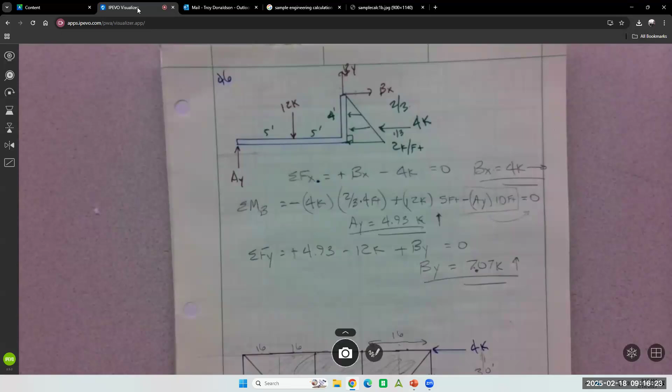All numbers should have units, right? So there is a basic format to calculations in academia, but there's also kind of a basic format outside. It can come to you a lot of different ways. So a lot of computer generated calculations are out there now.

This is a beam analysis. It's an LVL, so if you don't know what an LVL is, it's like a piece of plywood. It's laminated layers of wood, and we can take that grain of the wood and cross it. That's what plywood is, really thin pieces of wood, and then we can take the grain and cross it and build a beam that way.

Like a floor joist? And it's hell for strong. Like a floor joist? Well, floor joists can be regular timber, or the new ones they're making are like a truss joist. Yeah, that's correct.

So this one's rated at 1800, so that's an 1800 bending stress, 1800 PSI. Standard wood is about 800 PSI in bending stress. So if you just had a tree and you just cut a 2x12 and used that 2x12, bending stress would be about 800 or 900.

This is a pretty thin LVL, only 1.5 inches. So it's pretty thin, that's why its rating's down pretty low at 1800. You can get 3800 LVLs, 2800 LVLs, all different kinds. Still pretty strong, actually very strong.

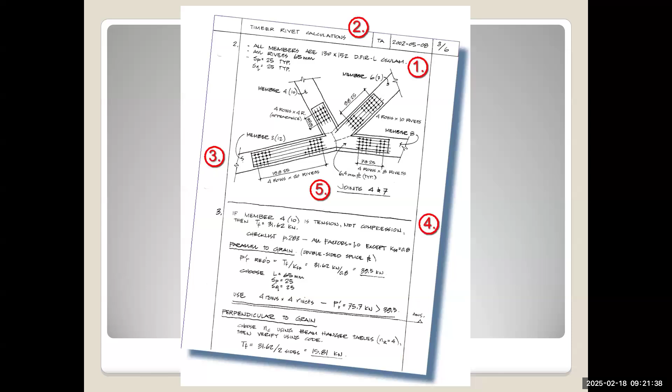So I'm not a big fan of these. I just am, I guess, old school a little bit.

All right, let's talk about a couple stresses that are pretty basic. Keep in mind, you'll take a whole term on this, so this is very fast, way too fast, but we can do it. You all are capable, you all have calculators, right?

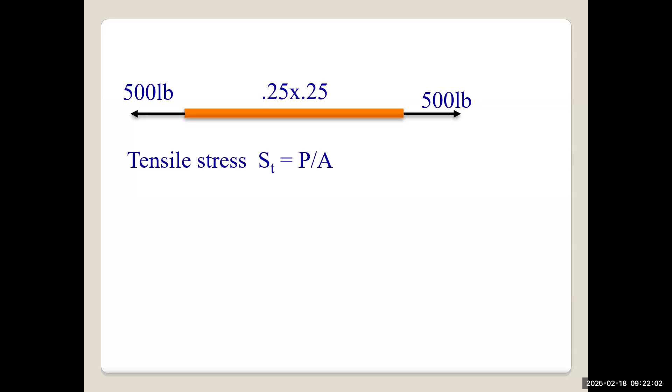Before we do the stresses, I want to give you the one that I think everyone's capable of, and that's the weight calc. So I want you to do a weight calc on your project. So the weight calc, come on. Y'all see that? Do I need to zoom in? I'll zoom in. How do we calculate weight?

If I want to calculate the weight of this yardstick, I don't want to just weigh it, but I want to calculate the weight of it.

That's my property. We need to know how much mass is here. What's another way of saying volume? We need to know the volume of this thing. Everyone understand what volume is? It's the amount of material that is in it three-dimensionally, a three-dimensional measurement of this thing.

So if I needed to know the volume of this, how would I get it? Length, width... all right, let's do it. It's multiplied by each. 36 inches long. It's supposed to be 1 inch, but it's not.

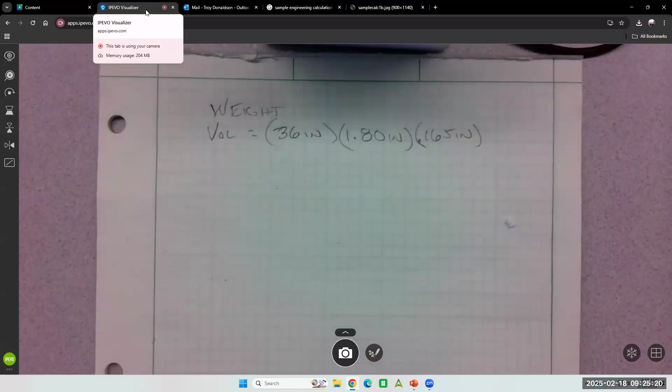So it looks something like that: 36 inches times 1.80 inches times 0.165 inches. What do we get? I got 10.69 inches to the third. So to calculate weight, we need the volume of the thing.

And then what do we need? Something that indicates how heavy the wood is per... what's that called? Density. We need the density of the material. No clue what the density is. Pretty light - how many cubic inches do we have?

Somebody Google balsa wood. I think it might be balsa. I have the density of mine right here. No, that's not so strong. Let's do balsa wood - somebody look up the density of balsa wood, and we need it in US units, not metric. Really soft, Google really likes to give you metric. Yeah, the density has got absolutely everything, especially wood, wood's good.

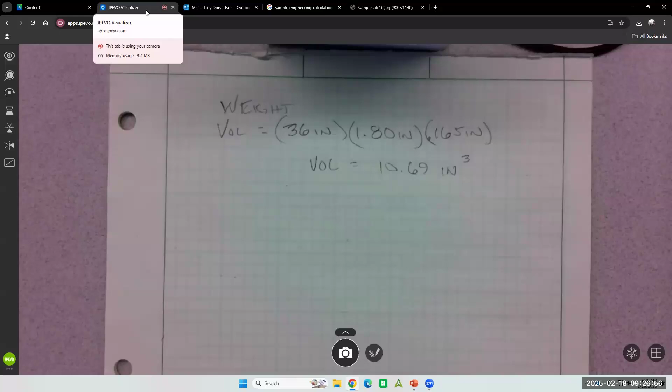Could be green, it could be wet wood, dry, it should be kiln dry. Anybody got a balsa density? We're gonna be looking for something like pounds per cubic inch or pounds per cubic foot. 8 to 16 pounds. All right, so we'll say the density is 8 pounds per foot cubed. That's what we'll say it is.

You'll get the same kind of information when you try to get the density of cardboard. I'm sorry about that, but good luck. How else could we get the density of this?

Is there any experimentation way we could get it? By smacking someone or something? No, not by smacking - that's a good idea though. Perch, I think it's perch. What about that idea? Yeah, we can get that. That'll give me the density of this, won't it? So I can get it by experimentation.

Is it actually reading anything? So isn't that too short for it? 0.04 - no, it's weighing the whole thing. Oh, okay, so that volume weighs 0.04 ounces. I think it's perch. Also it snaps really easy. It's on kilograms - let's get it off of there. Yeah, 0.10 pounds.

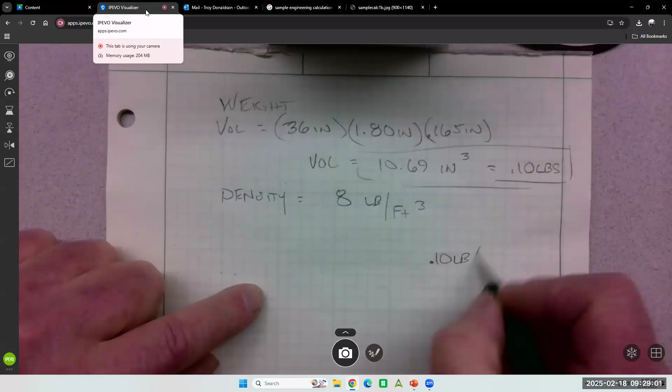So this volume weighs 0.10 pounds. So we can look up the density if we're pretty sure we can get it, or we can do it by experimentation if we know the volume of a sample. This says 0.10 pounds per 10.69 inches cubed, correct? That would give me pounds per inches cubed, and that is a density.

Gesundheit. Anybody got this number? You just - I'm assuming you multiply that. Don't multiply it, no, you divide it. It looks like a divide to me. Oh okay, yeah, because you're isolating - you're just figuring out what it is for the...

0.00935, yeah. Well, let's get it per foot cubed, that'd be better. How do we get it per foot cubed? You have to divide it by 12. Careful - where did you... the unit is cubed.

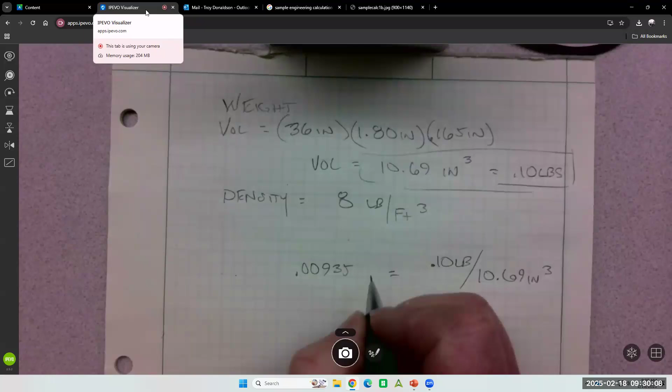So this is called unit analysis when you do a conversion. And I always write it out - I don't try to just think do I divide, do I multiply, what the heck do I do. I always write it out, always, even like 12 inches per foot, I write it out. If I'm gonna convert inches to feet, especially for somebody else that might be overlooking this.

So here's the density we came up with, and if I want it in pounds per feet cubed, then I need feet cubed on the bottom, and I need 12 inches cubed per feet cubed, because there's 12 inches, so that's the conversion. You cube the number, you cube the unit, both of them get cubed. Now these cross when I multiply them - that's called unit analysis. I want the inches to go away, inches cubed.

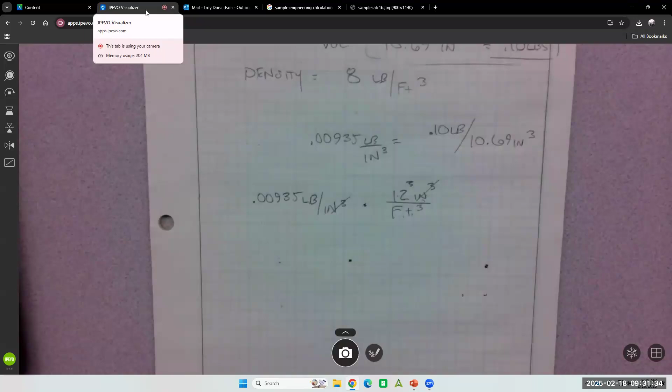Leaving me with pounds per foot cubed. So it's not a division, it looks like it's a multiplication by 12 to the third, right? Because the unit is to the third. So I can take my 0.00935 and multiply by 12 to the third.

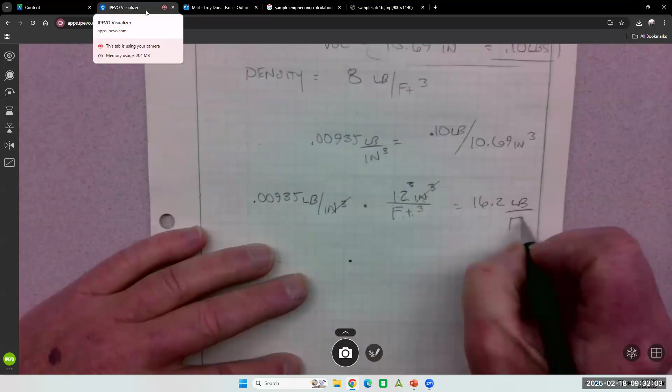Yeah, that's carrying everything out. You wouldn't want all that. I'd probably just call it 16.2 pounds per foot cubed. Right? What did you get? I got 16.2.

Makes sense? So you round according to how confident you are in the information you're getting. Like, I'm less confident, right? Because it's missing some parts. It's not actually the full 3 foot, and it's got another hole there, and a gouge there. And I actually don't even know if it's 36 inches. I think it's probably close, but there's some lack of confidence.

So then how would we get weight, now that we have this for my stick? Well, we got weight because we weighed it, but if we're calculating, we need the density and we need the volume. If I had more balsa pieces out of this material, then I just need the volume of those pieces multiplied by the density, and I get the weight. That's the weight calculation that I want.

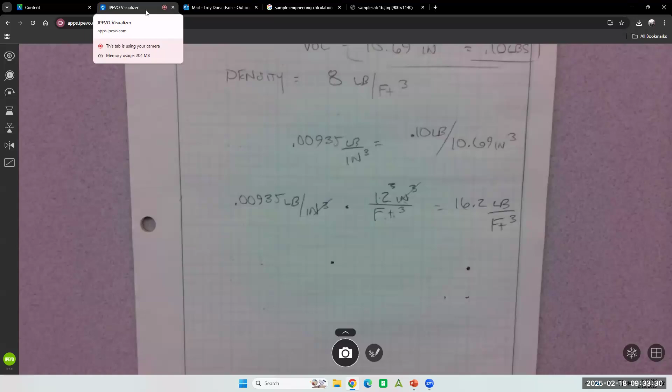I want you to come up with the density of the materials you're working with, and then calculate the weight of individual pieces. That's what we would do if we were doing a weight calc on a design. If you're in SolidWorks, you can set material to parts and get weight information per material. In the end, you can calculate the total weight of the system. So, individual parts, calculate the weight. That's a good calculation to have in your calculation package.

Make it presentable, beautiful, like engineers would. Good? So far that's a simple one. Pretty simple. You just need to measure your parts, know what they're made out of, and multiply by a density, right? You get a volume, multiply volume by density. Yep, that's right.

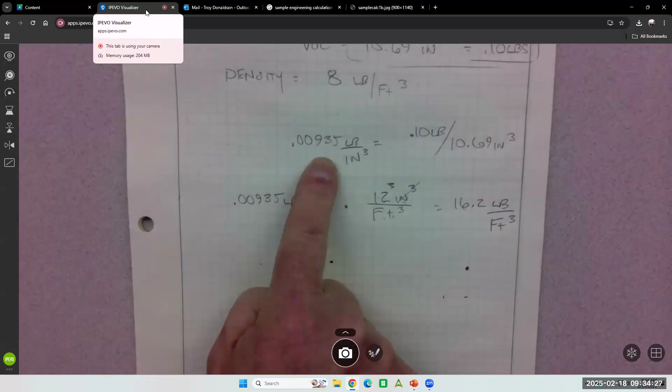If you're measuring in feet, then this is a good one to use. If you're measuring in inches, then this is a good one to use. So I wouldn't look up cardboard, I would take a piece of cardboard, calculate its volume, weigh it, and now you have the density of the cardboard you used. Because all cardboard's not created equal, there's a lot of different kinds out there.

Now, you can get as technically accurate as you want and as time allows. If you're gluing things together, you could estimate the volume of glue and come up with the density of the glue and add the glue weight in. It can go very technical if you want to really get tight with your weight. What I want to see is a calculated weight, and then in the end we're going to weigh our devices and see how that calculated weight compares to the device. It'll be close, should not be exact. So if you're fudging the numbers, don't make it exact. That's not gonna happen.

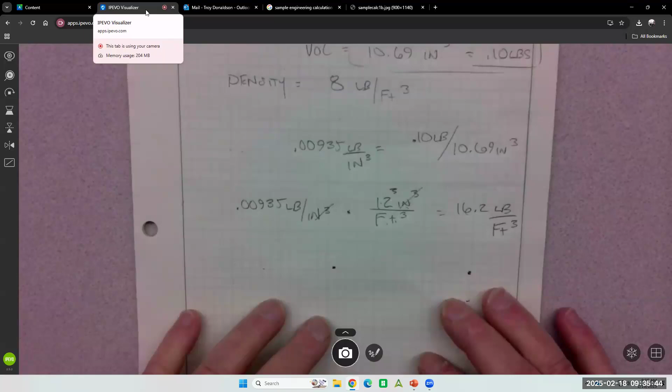Okay, questions on the weight calc? It's good. Okay, let's talk about some more that you could do. Unless there's a question, comment, anything so far.

We're gonna be weighing our builds in this factory. Right before you test on the final day, you weigh. And if it's so big that we can't get it on that scale, then you'll stand on a scale, and we can do the subtraction. I think most will fit on that.

We've only done two so far: bending stress and tensile stress. Tensile stress is going to be a hard one to come up with for this project, but it's an easy one for me to show you. Bending stress is more complicated. So bending stress, we should be able to come up with something we can do a bending stress on. I'm not asking you to do calcs on your entire system, I'm asking you to do a calc on one little piece of the system, a structural piece, a somewhat structural piece.

Okay? Like if you had wheels and an axle, an axle's an easy one to do a bending stress on, right?

If you have some kind of frame or mainframe, that would be an easy way to do a bending stress on. If you have a flat surface that has load on it, then we can simulate bending stress, and we're going to really simplify it. If you look at your device and have no idea what to do for bending stress, come to me and I'll show you something you can do.

Okay, so let's talk about bending stress. The simplest form of bending stress is like that beam that I showed you. So if you have a structural member, we're just going to simulate it as a beam. Even though it's not a beam, maybe it's a big flat surface that's carrying the load somehow, got the egg in the middle, who knows. We're going to turn it into a very simple bending stress calculation.

What is bending stress? The point that it can flex without breaking - it's not failure, that would be failure stress. As engineers, you're going to work in the safe region of material properties, so we don't want to get anywhere near failure. Most of the time, failure for us is too much deflection.

If you've ever walked in an older home, like from the 50s, as you go across the floor, you can actually feel the floor flexing, like it'll move. That would be failure today. In today's floors and homes, we absolutely don't let them deflect hardly at all, not even when you move the piano in. So for us, most of the time, failure is too much deformation.

So there's bending stress on it right now. I'm putting a very little bit of bending stress, and you can't see any deflection. That's the bending stress that we work with - that's safe. This, no. Nobody wants to drive across the bridge and watch it go like this as you go across it. Nobody wants that, right?

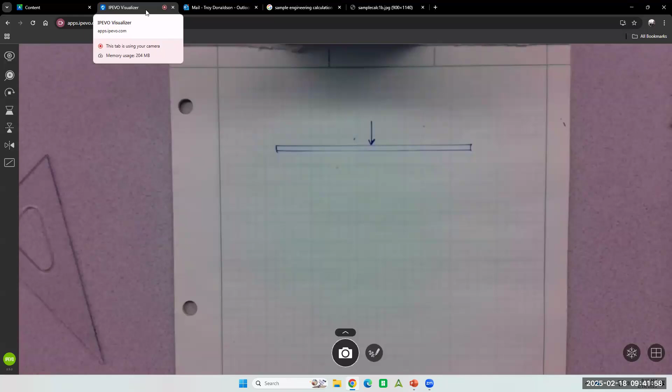So a car driving down the road at 60 miles an hour, cruise control, we can do a static analysis of that, even though it's moving - it's just not accelerating or decelerating. Okay, so if it's supported here and here, then we do need to have equilibrium in the system. So all the forces going down need to add up to all the forces going up. Anyone know that? Who's responsible for that law?

Newton, yeah. So Newton was sitting there under the tree, and that apple fell - well, that's the story at least. And then it stopped on the ground, and he's like, wow, what stopped the apple? The ground stopped the apple. How much force? Well, how much force was the apple pushing down? The ground was pushing up, equilibrium. So he got three laws out of just basically one concept. Pretty cool, because he said, oh, if it's not in equilibrium, then it's not in equilibrium. Like, no kidding. Anyway, all the forces down have to equal all the forces up.

So if this is 5 pounds, and it's in the center, symmetry - so be kind to yourself and set up the problem pretty simple. How much would have to be here and here? 2.5 on each side.

Right? And I didn't even know the distance. Like, is this thing a mile long or a foot long? I don't need to know that, right?

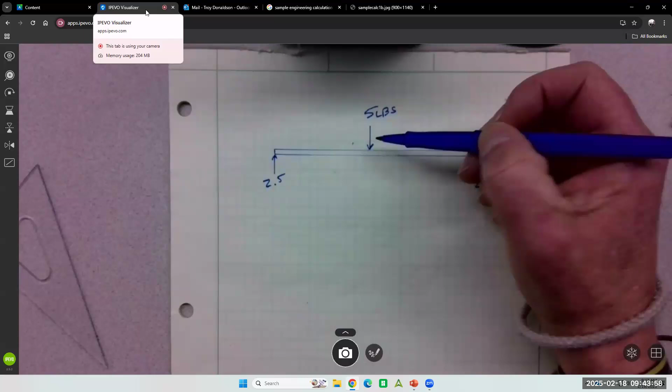Now, it's got 2.5 here, 2.5 here, and 5 here. And we'll say it's 6 inches and 6 inches. It's in the center. If it was different, that changes our loads on these, called reactions. But it changes the load on the supports if this is not in the center, right? As this moves closer to this side, this gets bigger, this gets smaller. There's ways to calculate that, but I'm not going to make you do that.

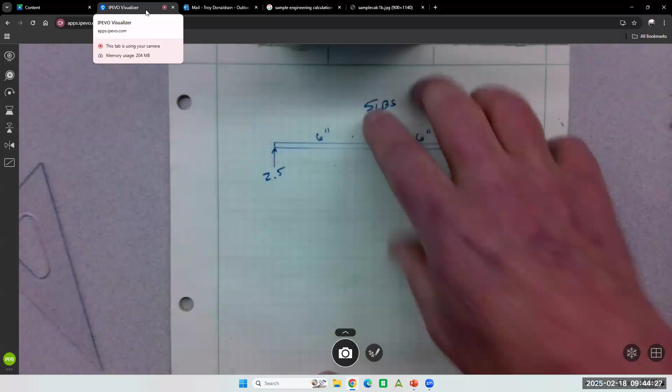So this is called the translational effect, the up and down effect, and we've captured it. It's good, it's in equilibrium. But now I need to understand, like, if it deflected or changed its shape, what would it look like?

If it deflected, if it bent, it would bend like that, would it not? That's bending stress. That's the effect of the load at a distance. And what we need to know is, can our material handle it? Can our material handle the bending stress?

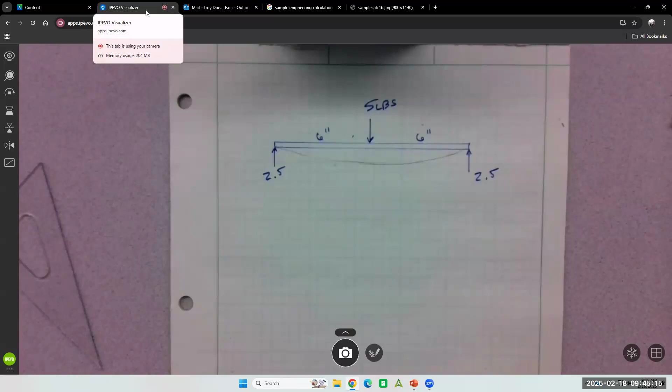So we have to be able to calculate it, the bending stress. The formula is MC over I.

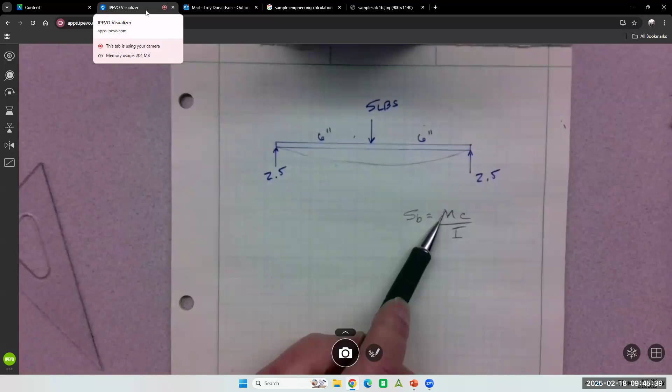So this is S for stress, B for bending, M for moment or torque, C for the C value, which I'll have to explain, and I for inertia. Those are all the parts and pieces of the bending stress formula.

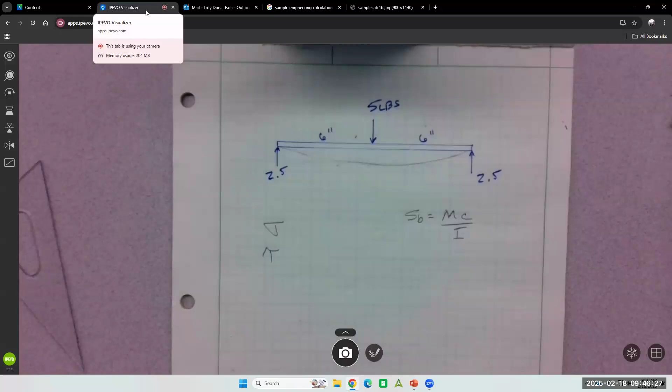If it was tensile stress, it would be S sub T. Different books in academia, not all engineers agree on what this should be called. I'm using S for stress. Sometimes it's Greek letters, so that's bending stress, and in a lot of books that's tensile stress. In a lot of books, I think that's tau. I don't know what that is, beta, something like that, right? So it can be Greek letters in books. I'm just using S for stress and B for bending.

So that's the formula we want to run to try and understand what the bending stress is. This will be a calculated bending stress. We're going to calculate it, right? Then you take your calculated bending stress and compare it to the material that is being bent.

And if this is balsa wood, I would need to look up balsa wood bending stress. I'm not gonna look it up right now. S sub B balsa, we'll just say it's 400 PSI. But this is a material property. So if you're using aluminum for your struts, or mild steel, or titanium, you gotta look that up. You gotta know your properties. Because this is just gonna be a calculated property, and I have to compare it to the actual property of the material, right?

Good so far? What's the value of C? It's a good question. We're gonna work our way through this formula. C is actually, I'll do M first. So we'll do M, we'll do C, and then we'll do I. Okay, in 10 minutes, this is good. We might have to do this again on Thursday, just right at the beginning of the lab. Might be helpful. All right, M is called the moment, but it's also a torque.

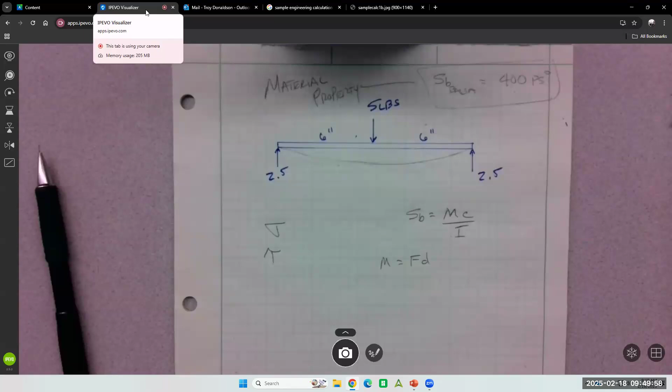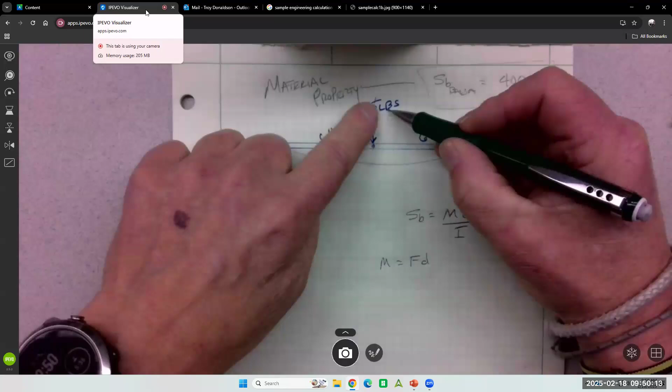So if I am here at the very center, and I want to know what's going on here, this force is applied right at the center, so it doesn't create any moment. It would be 5 times 0 because I'm right here, no distance. D is for distance. So where's the furthest away force?

The furthest away force from that point, this one's right at the point. It's out here at this 2.5 or this 2.5. That's why we're in the center. So it's simple, right? So our force is 2.5 pounds. How far away is it from my point? 6 inches. Yes.

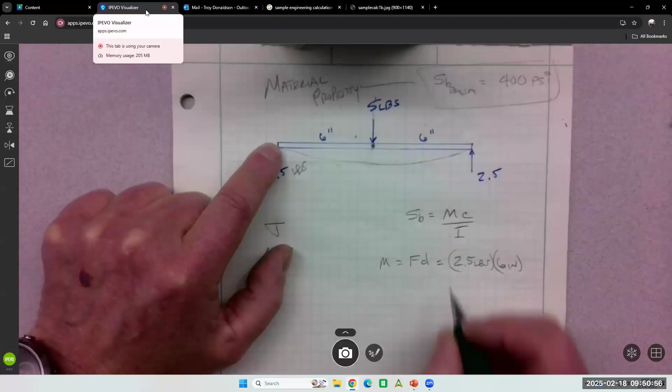What's my moment? Who's got a calculator in this class? Don't do it in your head. Don't ever do it in your head. 15. See, you were way off.

How much? 15. 15, and what's the unit? Inch pounds, not inches per pound, it's an inch pound.

What's an inch? This is the core of life, just so you know. This is like the meaning of life. What's an inch pound? What's an inch pound? I know, and is that pound per inch? No, it's an inch pound.

It's torque. Okay, yeah, okay, because what do we do with the units? We multiplied it. Yeah, it's an inch pound. It's a pound inch, but I can't say that comfortably. For some reason inch pound is more comfortable for me. Same thing, pound inch, right? That's our M.

That's this. Good so far? Not too bad, as long as you get a little drawing and you can do this moment calculation. All right, C, what's C?

C is, I'm just gonna have to show you what C is. So this is our beam we're working with, right? This is the cross section. So when someone says cross section, they mean like chop right in half and look at it. It's this rectangle. That's a bad one. There, that one's better. Well, I've got a chip out of it too, but you know what I mean, right? Cross section, that makes sense?

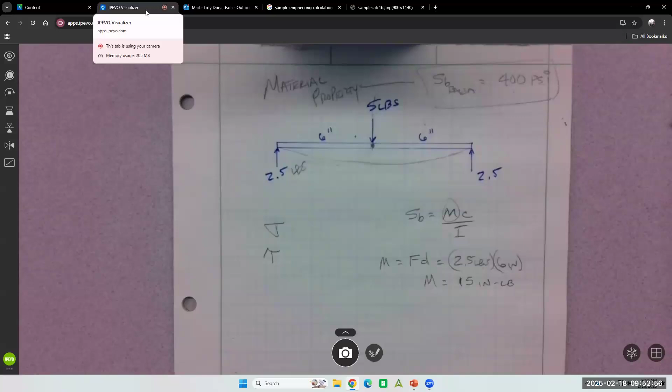So you've got to have like a little picture of the cross section, so I'll draw it here, kind of in line with my beam, right? But that's what the cross section looks like. Agreed? Now that we know what cross section is, what was this thickness? 0.165. 0.165.

So here's the neutral axis of this little beam. It's the geometric center, and if you have a rectangle, it's the simplest one. And here is C, outermost fiber to the geometric center. Of course C changes with the different shape. If it wasn't a rectangle, if it was a pipe, it's from the center of the pipe to the outermost fiber. If it was an I shape, it's from the outermost fiber to the geometric center. So it's very dependent on shape.

What would our C be? You have to, yeah, exactly. It's going to be half of the 0.165. C is going to equal 0.165 divided by 2.

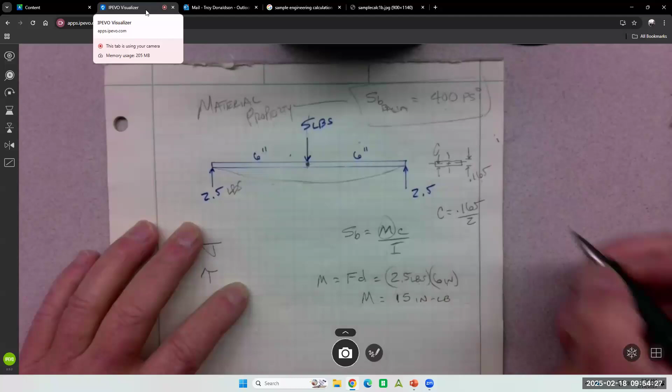What defines fiber? I mean, it's not like right at the very end. Fiber, outermost fiber is this surface. Oh, outermost fiber is this surface. Okay, so if this was like an L shape, your C in one direction is different than your C in the other direction, but we don't need to get that complicated.

Why are we measuring it from the short end? Because that's the position I loaded it. It's a great question, right? I've always been doing this, I haven't been doing this, because this way it's really strong, I can't deflect it, right? But this way is the way I loaded it, so that's the position of it, it's perpendicular to the load. Yeah, good question. All right, so now we have C, we just need I.

You'll notice in here there's no material properties, because that's just a calculated bending stress. This could be made out of silly putty, doesn't matter, we're still going to calculate the bending stress and compare it to silly putty, and then say silly putty's not going to work, right? It's not even close. I'm guessing balsa wood's not going to work for this load condition, but maybe it will, I don't know. So it's independent of the material. When the material comes into play is when you compare it to something. That makes sense, yeah.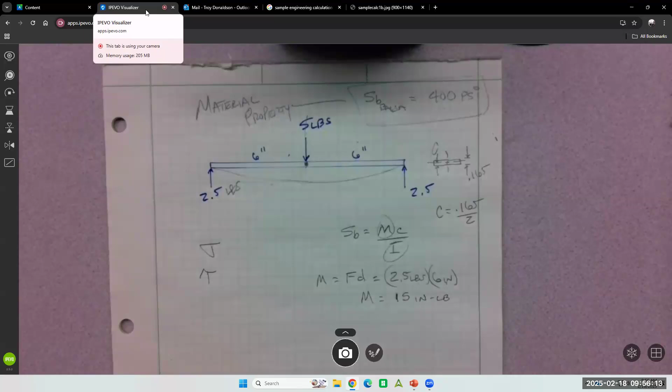Okay, the last one is inertia. I know we're out of time, so I'm going to do it quick and then we'll do it again on Thursday.

This is area moment of inertia, different than dynamic inertia. You might be thinking inertia is like I take this weight and throw it at you and you get hit by it - that's dynamic inertia. This is area moment of inertia, and it's strictly a mathematical calculation that we need. That's all it is, mathematical gymnastics. It is an indicator of resistance to bending, and it's completely based on the shape of your beam.

So inertia for this is different than inertia for some other beam. As the cross section changes, inertia changes. We literally just have to calculate it. There are formulas for inertia for different shapes. If it's a triangle shape, we use that inertia formula. If it's a round circle, or a hollow round circle like a pipe, we look up the inertia formula. If it's an L shape, we look up the inertia. If it's an I shape, we look up the inertia. Every shape has its own inertia. What is our cross-sectional shape?

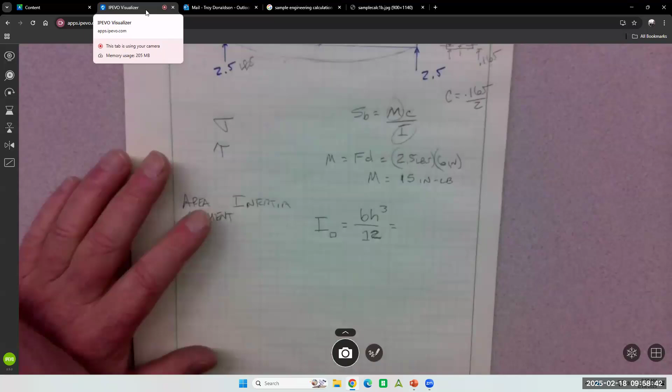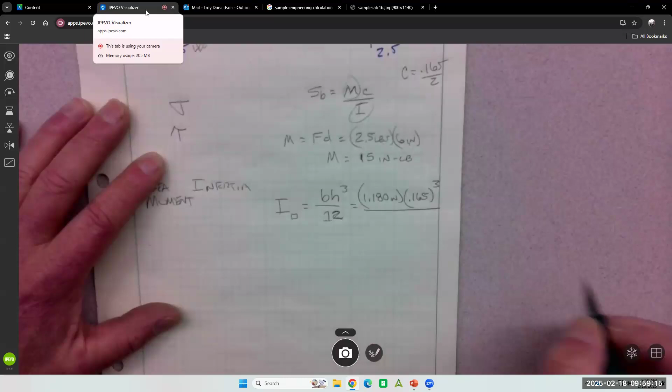What's our base? One inch, or was it - what was our base? 1.180 inches. What's our height? And what do we do with the height? Don't divide it by 2, we cube it, divide by 2 for C, and then we have a constant down below, 12. That formula where you don't divide by 2 is for that other case.

So that's our rectangle, right? Our rectangle looked like this, this was our base, our height. What number is being cubed? The height, okay yeah. So our height is really thin. How's my resistance to bending? It's not good, it's terrible. I can bend it super easy.

What if it was this way? Then that would be being cubed, and that's going to drive the inertia number way up. That's an indication of bending - I'd literally have a difficult time bending it, it's super strong in that direction. So inertia would go way up if we put our beam this way, but we don't, we have our beam this way, and our inertia is going to be pretty small, I'm guessing.